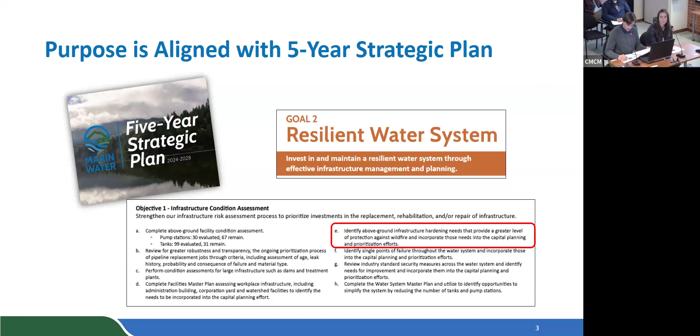This condition assessment performed defensible space evaluations at pump stations, ranger residences, the Sky Oaks Ranger Station, and the Lagunitas Spillway. This work was done in coordination with MWPA, the Marin Wildfire Prevention Authority, and the initial partnership allowed us to create a framework to complete the evaluations in a consistent and technical manner.

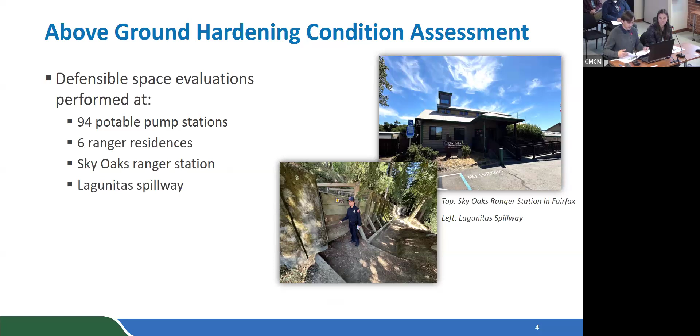What is a defensible space? A defensible space, as defined by CAL FIRE and the Marin Wildfire Prevention Authority, is the area that extends outward from a structure on all sides to a distance of 100 feet or the nearest property line, whichever is closest. A well-established defensible space provides fire crews with a safe area to operate in the event of a wildfire and reduces fire fuel loads in the area surrounding a structure.

Defensible space is subdivided into 3 zones. Zone 0 extends 0 to 5 feet and is considered the most critical because it is closest to the asset. Zone 1 extends 5 to 30 feet from the asset, and Zone 2 extends 30 feet to 100 feet or the nearest property line.

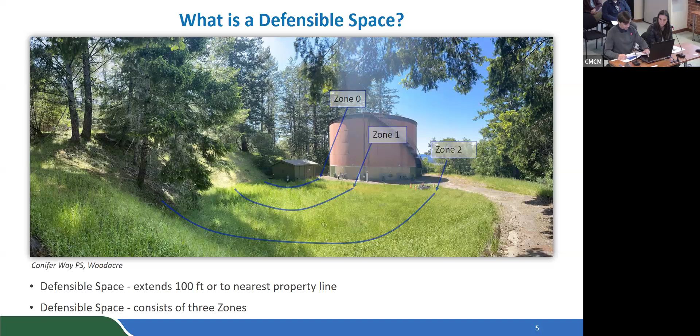Each evaluation was performed using a top, down, and out approach. For example, the evaluator will start at the top, beginning the assessment at the roof of the structure, then proceed down to inspect each side of the structure, and finish out with the defensible space evaluations.

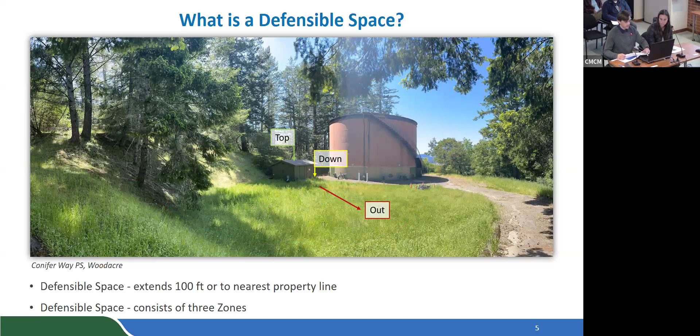On the next slides, we will discuss the typical observations for each asset class, beginning with pump stations. The items presented here illustrate the typical defensible space observations found at some of the pump stations. Some of these actions are considered regular ongoing maintenance activities that are currently in progress or have been completed, whereas others are considered longer-term capital improvements that will feed into both the short and long-term CIP plans.

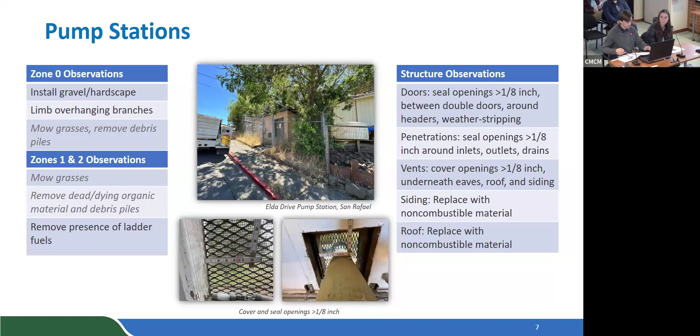Larger CIP projects are needed to address some of the observations made during the condition assessments. To maximize the resiliency of these structures, district criteria takes into account structure hardening practices, such as the use of non-combustible materials for siding and roofs, as well as installing appropriate vents and screens during the design process.

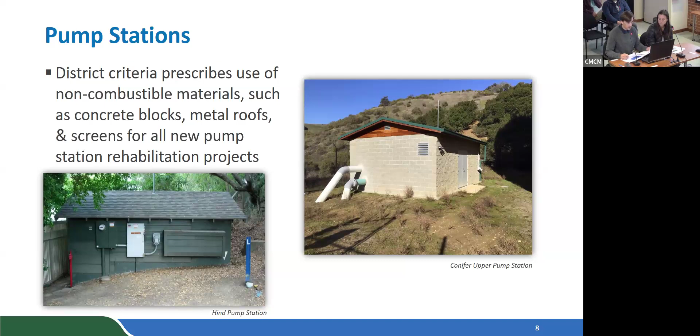The figure on the left shows the Hind Pump Station installed in 1955, which is a typical structure from this time period. The figure on the right, the Conifer Upper Pump Station, is one of our newer pump stations, installed 5 years ago and incorporates the latest best practices.

We also looked at the Sky Oaks Ranger Station. In general, the Sky Oaks Ranger Station is in good condition from a wildfire hardening perspective, in large part due to the ongoing maintenance activities such as the well-managed grasses, break lines, and the minimal presence of ladder fuels and debris piles.

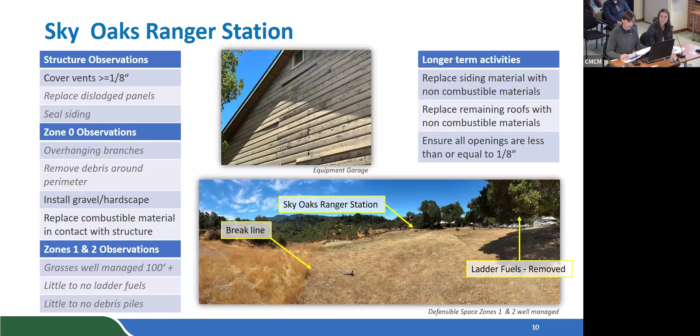However, there are some longer-term activities that should be considered in the upcoming CIP plan, such as replacing the siding and roofs with non-combustible materials and ensuring that all openings are less than or equal to 1/8 of an inch.

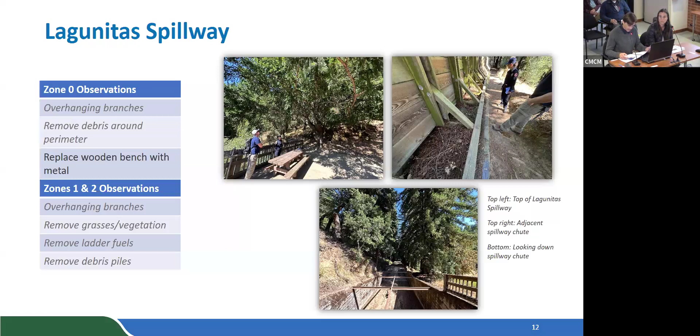We took a similar approach when looking at the Lagunitas Spillway. The Lagunitas Spillway is the only wooden spillway in the district and is in relatively good condition. The same framework was used to evaluate the conditions in the various defensible space zones, and many of these observations have already been addressed. These actions improve the resiliency to wildfire and are incorporated into regular and ongoing maintenance activities.

Finally, we looked at the 6 ranger residences. Using similar efforts as was done for the previous assets, the same top-down and out approach was applied. The defensible space around each structure is in good condition, in large part due to ongoing maintenance activities. Staff observed some actions that will be incorporated into the long-term CIP plan, such as replacement of combustible materials with non-combustible and installation of hardscape around the structures.

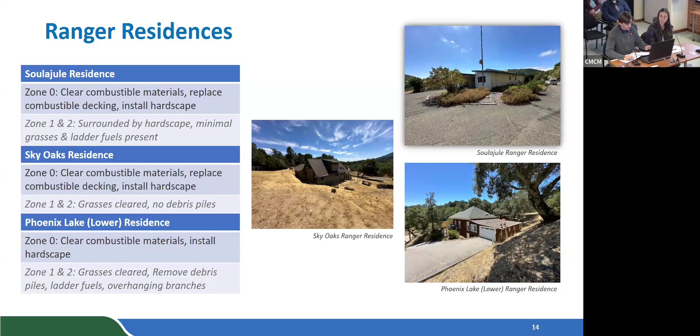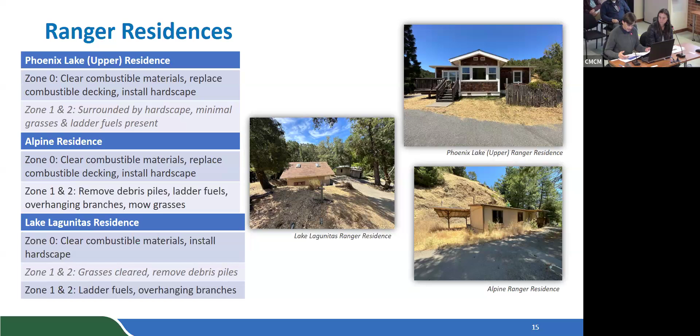The remaining 3 structures, which are currently unoccupied, have similar observations. Should these become occupied at a later date, staff would ensure these unoccupied structures will have a maintenance program in place similar to the current structures.

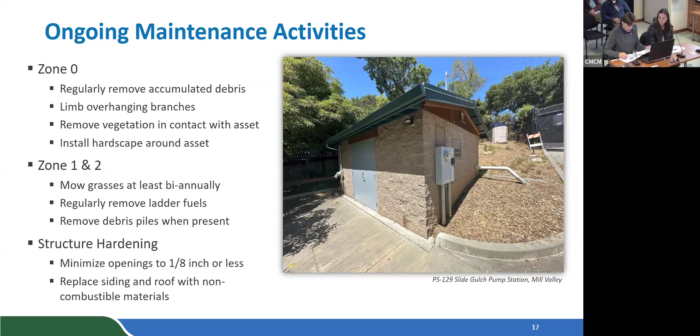Finally, we will discuss the ongoing activities and next steps. Many of the current best practices are already carried out by the district with its fuels mitigation program at regular intervals, and this is considered ongoing maintenance activity. Some of the larger actions, such as replacing siding or roof, may be addressed by district staff through a maintenance activity, or if too large, may be incorporated into the CIP program.

In terms of next steps, staff will continue the refinement of maintenance practices with a focus on wildfire prevention. We will also be incorporating the information on structures into the upcoming and long-term CIP planning process. Thank you for your time.

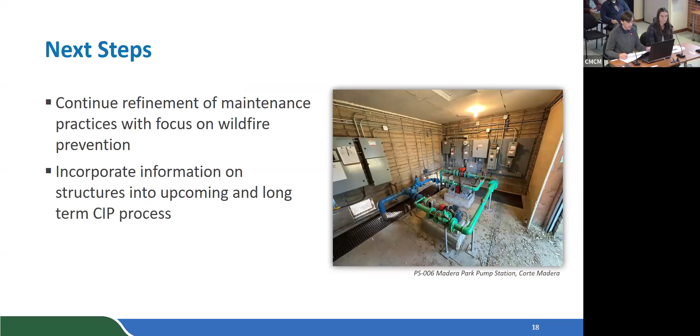Thank you, Brian. Questions? Sure, I don't mind going again.

Alicia, I appreciate the acknowledgement, but the thanks really goes to you and your team for getting this done. And I'm very happy to hear that it was a beneficial exercise and provided a lot of low-hanging fruit that we can attack right away, especially around all this critical infrastructure in the middle of nowhere, surrounded by fuel. So I'm very glad to see that.

Also, thank you for partnering with Marin Wildfire to get the subject matter expert component brought in on that. I encourage those who haven't seen the IBHS, the Institute for Business and Home Safety, the insurance industry's research arm, to look at what Zone Zero can do for a structure. They burn home after home after home with structures that are up to their standard and not. It's actually the same framework that the insurance commissioner is putting out for the state of California, the Safer from Wildfire framework. So we're following that, which is great.

How is this data being tracked now? Do we use Marin Wildfire software to evaluate each structure and then get a report, or not? We haven't been using their software. We've been collecting this data internally and essentially starting a database.

The actions that are going to be placed into the longer-term CIP plan will also be incorporated into our more comprehensive pump station assessment that we'll be completing this year. That assessment will take into account not only the fire hardening, but also the actual pumps and motors, the electrical and communications equipment, and we'll be feeding all of that together to really form a pump station rehabilitation program within our long-term CIP. Great, great.

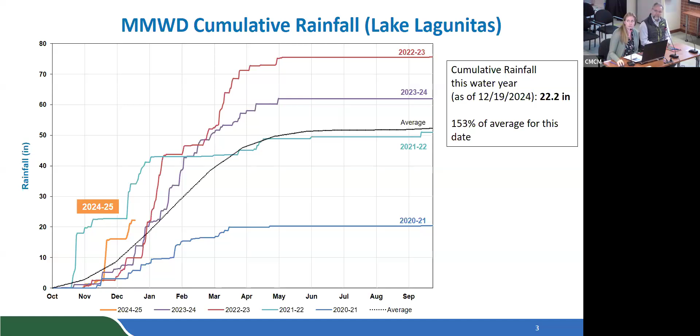Playing with all the... did I go too far? Yeah, 1, 2, 4. Having all the technical difficulties today.

Looking at our reservoir storage, with the 2 wet winters we've had the last 2 years, we started off with really high reservoir storage, and with the rainfall, we're now actually at the highest we've ever been for this time of year. In December, we're up at around 75,000 acre feet, and Kent is the only reservoir that's not spilling currently. We expect with a little bit more rainfall, we will be spilling all of our reservoirs very soon. So all good conditions going ahead.

And the spilling offsets the releases. Yes, it does. Right now Soulajule is spilling, so that offsets there, and we expect that as soon as Kent starts spilling, that'll offset that release too. But even with the runoff we're receiving from the watershed downstream, it does help quite a bit, so we haven't needed to release nearly as much as we typically would if it were drier.

Are we seeing a benefit from the new stream gauge system at all? We've been testing it, running it in automation at times, and testing as we've had some power outages, watching and monitoring it to see how the automation runs compared to how we would manually run it. Generally it's done a very good job monitoring the system every 3 hours and making adjustments as needed, turning down the releases maybe in the middle of the night when rain hits, where we wouldn't necessarily have someone manually monitoring it. So that's one of the adjustments we've been watching so far.

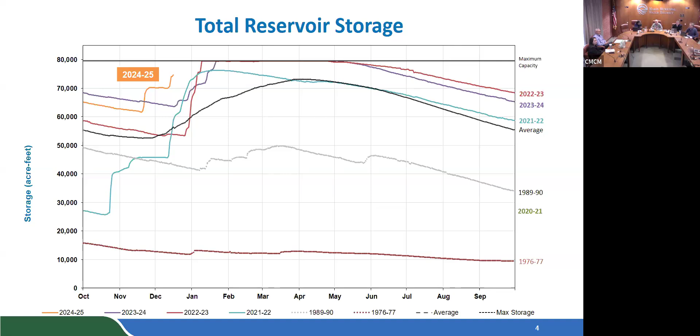There's requirements down at Samuel P. Taylor, which is about 3 miles downstream from Kent, and so we're required to meet those stream flows down there. How we get there, whether it's runoff from the watershed or from Kent, we just need to make sure that it's met at that point.

Are we worse off on temperature or better during spill? It depends on the time of year. We're always releasing from the lowest part of Kent Lake, except when we're spilling. So we do our best to meet the temperature requirements. But what happens when it's spilling? It's typically in the summer where we're challenged on temperatures. Okay, so it's cold enough right now. Yeah.

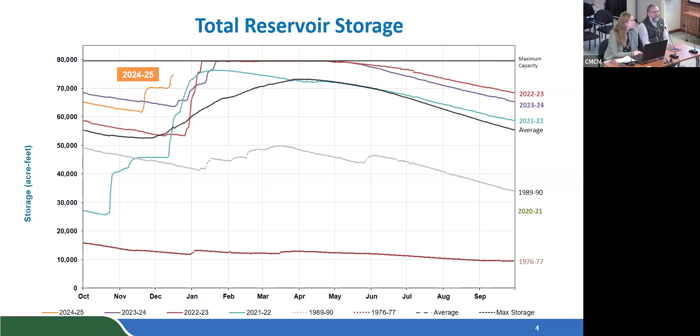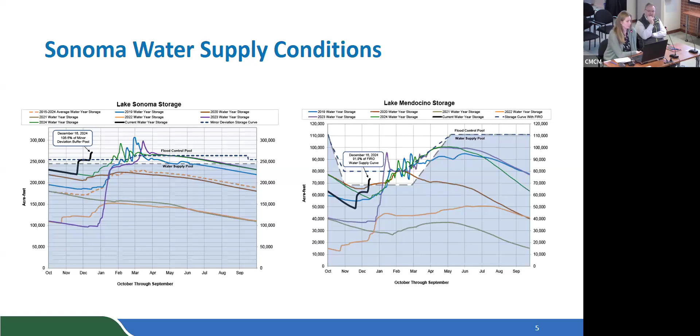We're looking at the black lines here for the storage level in the relative reservoirs, right? Yeah, it's interesting, this year's well ahead, huh? Yeah, I think we started off ahead and have gained quite a bit of rainfall and storage early on. As my flight instructor likes to say, if you have a choice between being good or lucky, take lucky.

I've always loved that part, that rain has a twofold purpose here: filling the reservoirs, but also reducing irrigation needs. So it's kind of interesting how those two walk hand in hand. We benefit twice.

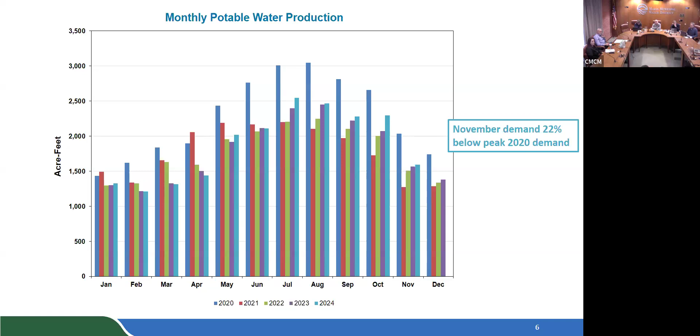Right now we're averaging around 20 to 20,500 acre feet per year. You can just think about that, forgetting about the environmental issues, think about it from the finance side. It makes it tricky.

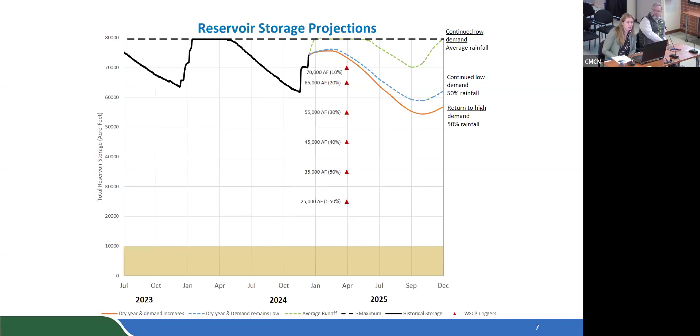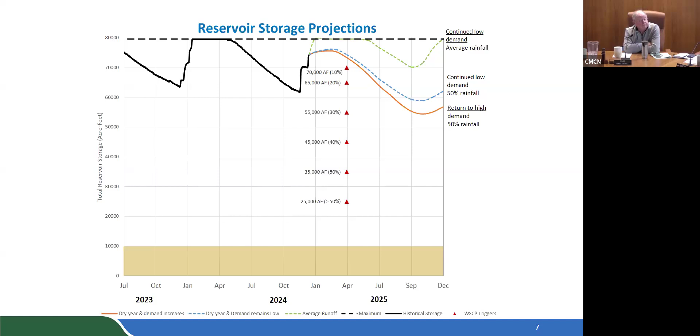Looking ahead, last year we joined the Center for Western Weather and Water Extremes Group through Scripps down at UC San Diego, and have been receiving updates as it gets wetter. They actually send updates every 2 days or so, and I have a few examples coming up of some of the updates we've been receiving.

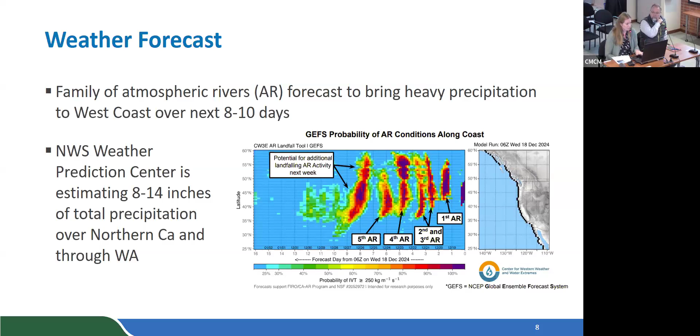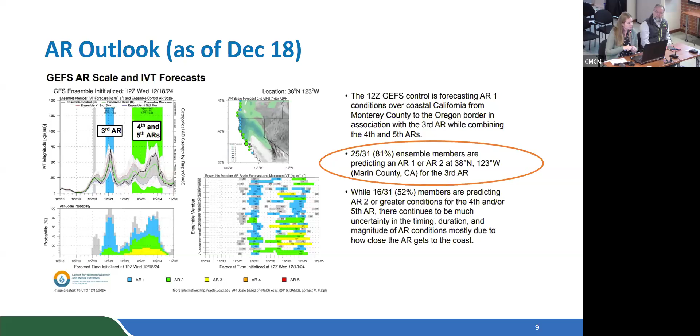So just providing some information on the value we've gained from joining this group - it's been helpful in knowing what we can expect with our watershed and runoff to our reservoirs.

Do we feed that back into our Sonoma purchases? We tried to. Our Sonoma purchases this year are currently shut down at the moment because we're so close to spilling. It does look promising for us to reach spill capacity, but this kind of information would help you with planning, for example in a dry year scenario - you could get ready to start moving Sonoma water into our system.

I'm always amazed when dealing with our ag clients how sophisticated their weather information is. They really worry about it.

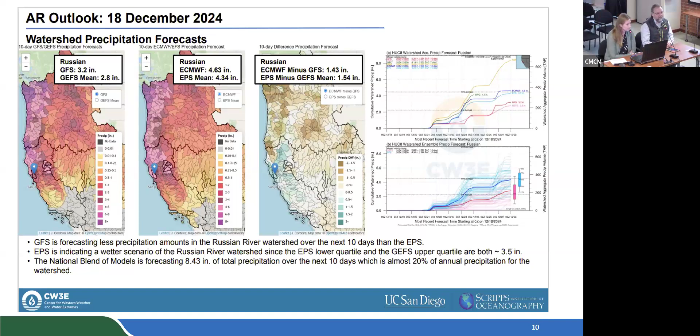How far out now will they project for us? It depends on the model you're looking at. Some of these finer scale models are usually 8 to 14 days. Looking at the National Weather Service, you can look at seasonal forecasts, though there's less certainty. The holy grail the Center for Western Weather is working on is the 6-week to 2-3 month window - subseasonal to seasonal forecasting - which would really be helpful for agencies like us. That's the current holy grail they're trying to pursue.

So all in all, reservoir storage is doing great right now after the rain we've received this year and previous years. Our conservation levels continue to be considerably below pre-drought levels but also starting to creep back up. We expect that wet conditions will continue through the coming weeks - so an easy water supply update to give today.

I'm happy to take any questions. Just on our reservoir levels, obviously the rain is having probably most of the impact - did we also purchase more from Sonoma this year to maintain higher levels going into the rainy season? That must be a tricky aspect of the management.

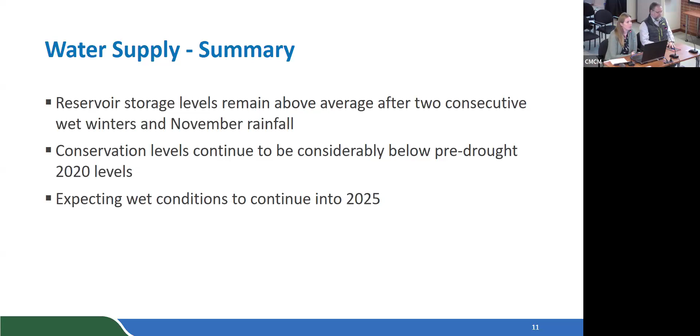We did purchase at accelerated levels, but not any more than we did the previous year. There were some operational constraints - they were recoating the Castania tank. So it wasn't any faster than last year, I would say.

A number of years ago, we developed a strategy we've called front loading, which instead of staggering the deliveries from Sonoma through the year, we push through the early months - in the summer - to maximize and really take as much as we can by now, and we're very close to taking our allotment. That allows us room to take more than our minimum if we need it, if it's dry. That's kind of our thought currently - we take it early, we front load it, and then we monitor the weather, and we're able to take more than the minimum because we've already taken the minimum and stored it based on the need, based on the weather.